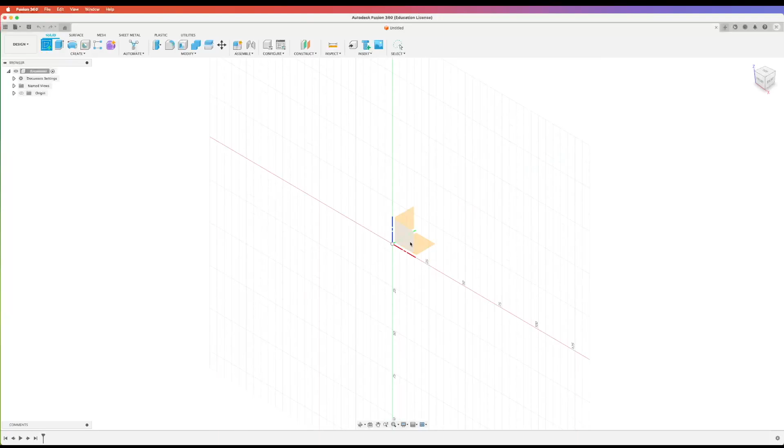Okay, exercise number 11. Now, what I'm going to do on this one is something that's a little bit tricky and complicated, but I just want you to see if you can follow along with me and understand what I've done. Now, you can draw it heaps of other ways, but this way is complicated, but it'll take less steps to do. So if I go and start my sketch, I'm going to draw from the bottom.

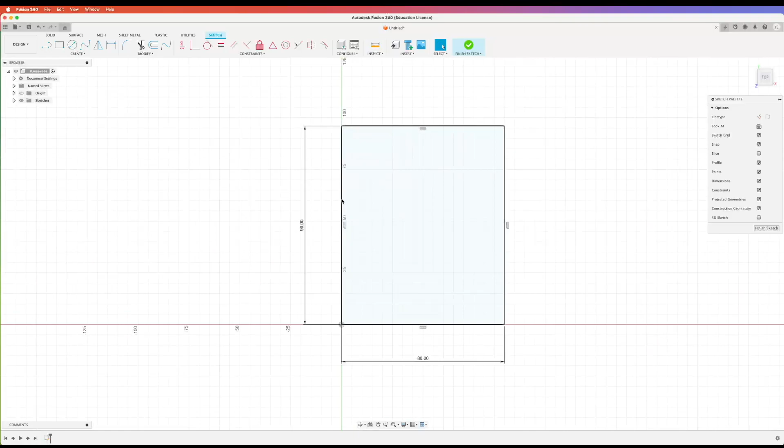And what I'm going to do is I'm going to draw a whole bunch of rectangles. So I'm going to draw the overall shape first. So looking top down, I know that it needs to be 96 by 80. So that's my overall shape. Now what I'm actually going to do as well is I'm then going to go and draw in all of the other rectangles. So that's that little rectangle there. And he's 14 by 14. The dimension from that corner to there is 38.

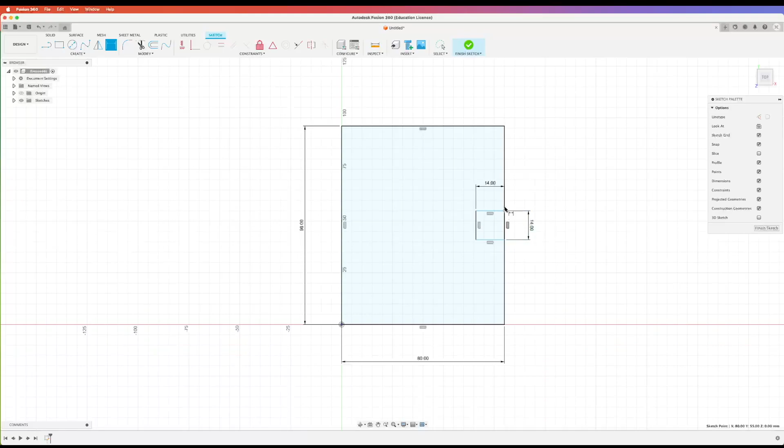I'm then going to go and draw in all of the other ones too. So let's grab that rectangle tool. In this corner to here, that rectangle is that whole distance and it's 24 wide. I'm then going to add on this little rectangle here, which is going to be 10 by 24. I'm going to cut that line out. So there's our whole shape there

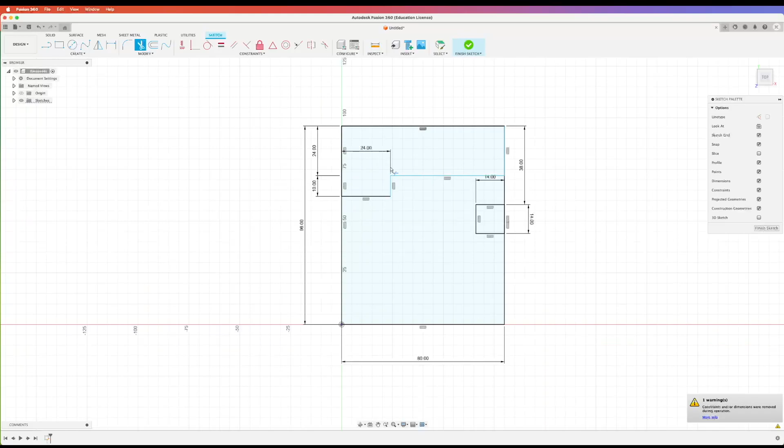for this tall bit. I'm then going to add another rectangle that comes from there to there. So that's 24 wide and 62 long. I'm going to add another rectangle down here, which is going to be 24 wide. And the length of our rectangle is 80 minus 14. So then I can trim out this corner and this corner.

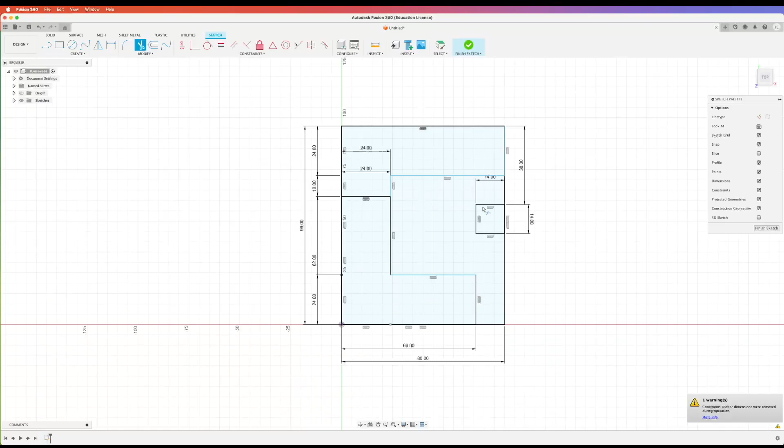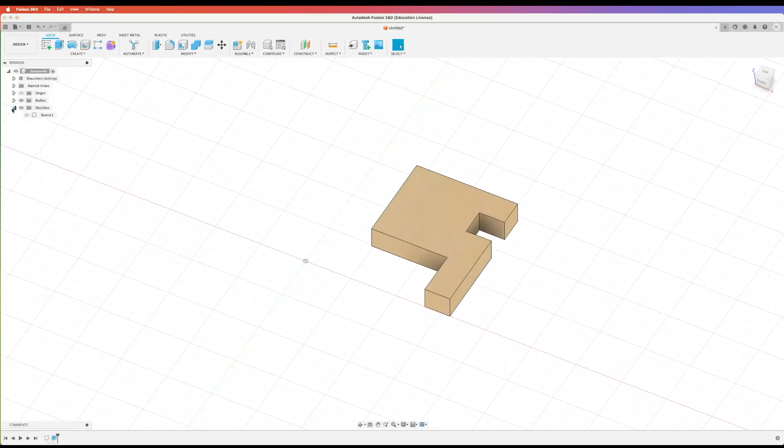So essentially what I've done is I've drawn all the different shapes on the different levels. I'm going to finish that sketch. Now, what am I going to do here? I'm actually going to extrude each and every one. So this one here has to come up 12. And my sketch disappears. But if I go back into my sketches over here, I can turn my sketch back on, and then I can extrude this one here up 30, and this one here up 42.

And you can see, just by spending that extra time in my sketch, I now have all of these shapes drawn. It looks a bit funny because my sketch is still there, so let's turn him off now. And I've got majority of my shape drawn already. Now, if that's very complicated, you can just draw the base and then add on the other bits as you go, and that's perfectly okay.

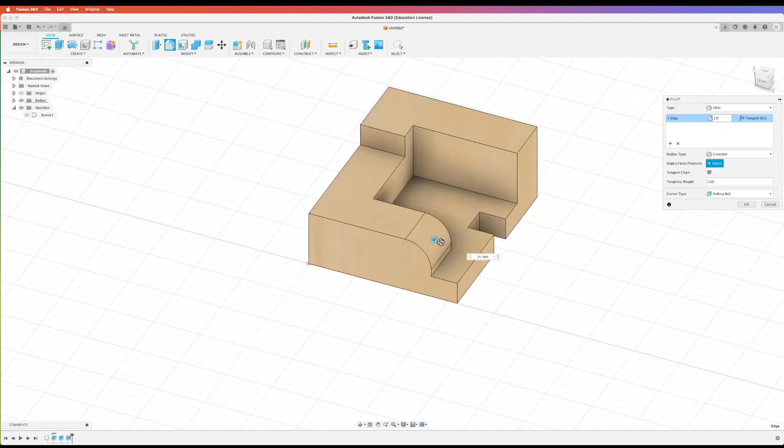For this rounded bit here, I'm going to use a fillet. I'm going to use this fillet tool here. I'm going to fillet this corner, and it needs to be a radius of 14. So there's my fillet. And then I just need to cut out this corner here and this corner here. Now I'm going to do them two different ways to show you two different ways. So number one is the normal way.

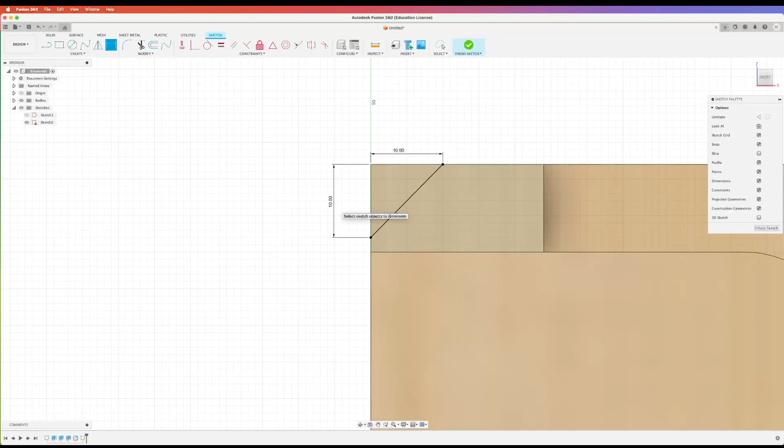I go sketch into here, and I grab my line tool and I draw that shape. I'm going to dimension him. He's going to be 10 by 10. And then I could extrude him back through everything and take it away. So there's option one. Option two over here is similar to a fillet, which is a rounded corner.

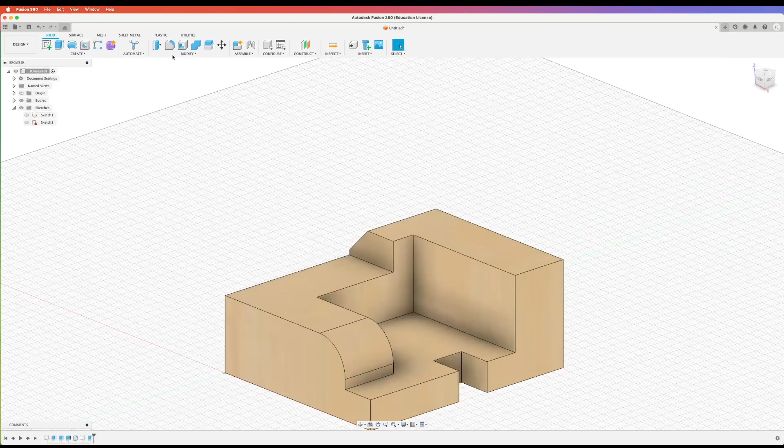We can actually do this thing called a chamfer. So if I come over into my modify section, I can choose chamfer, which is taking off that angle. So if I choose chamfer and I choose this edge here, I choose my dimensions I want my chamfer. So it's how far do you want it from each edge. So in this case, 10 and 10, because it's set to equal.

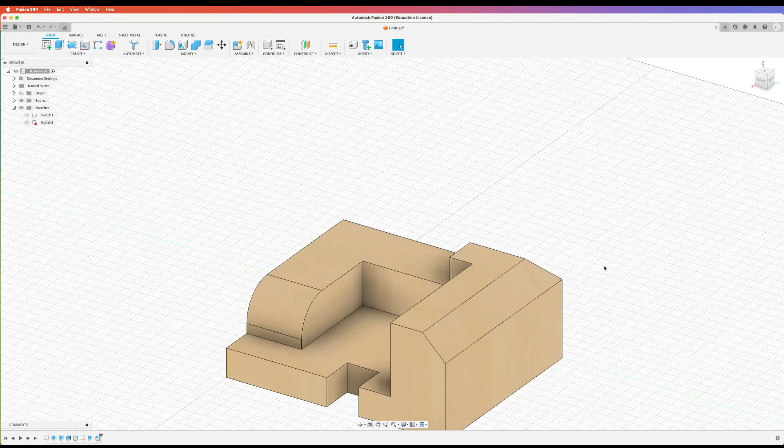If I wanted different ones, I could go two distance. I would say 10 one way, 5 the other. And you can see it's going 10 this way, but only 5 this way. But let's make him equal. So it's 10 and 10 as it's supposed to be. And there is my shape. There's two different methods of doing chamfer, and we've used a fillet as well.